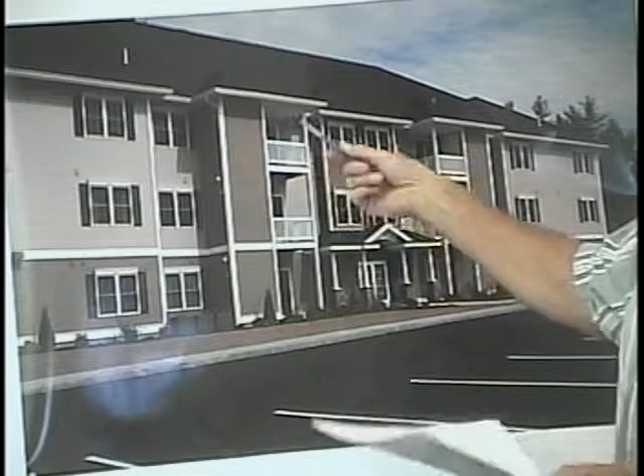In the utility rooms here, you can see the venting. Our units are 95 plus efficient units for the furnaces with central air conditioning. We also go with a direct vent, instantaneous hot water heater, Rinnai, which is an incredibly efficient unit. So we're going high efficiency on everything.

The building itself is Energy Star rated with windows, appliances, the HERS rated, and we get the kickback for the energy compliant building with the bath fans. Everything in the building is considered Energy Star compliant. So we spent a lot of extra money on heating equipment, domestic water heating, cooling, windows, insulation. Our sound transmission ratings are high.

We have a nice stone veneer entrance that you see coming into the building here. So we've paid attention to a lot of the detail. We've given it better lines by breaking it up, doing shake shingles here and then clapboard here, changing the colors, going with the darker color on the bottom so it doesn't show up if you have any splash or anything, doesn't show up as much on the siding. Putting the frieze board, as you see here, to break it up, the railings between the units, the turned columns. So there's a lot of attention to detail on the plans. Window caps with keys over windows, shutters, all of that gives it that ooh appeal. So when someone goes up, they're going to say, ooh, that looks nice. So it's dressed up.

And off to the far right, you can start to see some of the garage stalls here. There'll be 10 garage stalls per 24 unit building. So there's 10 bays per 24 unit building. And in those bays, there's an electric door opener. So when the tenant comes in, they'll have a door opener, they hit the garage door button, drive in, get it out of the weather, come in.

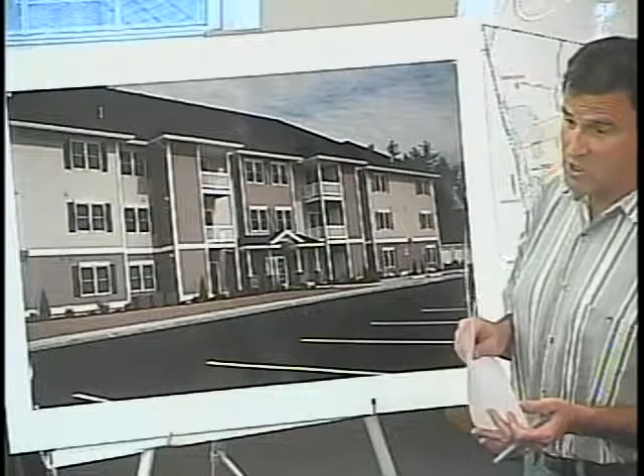Interior of the building, standard items are tile floors in the kitchens, tile floors in the bathrooms, granite countertops in the kitchens, granite countertops in the bathrooms, undermount sinks, as we mentioned before, air conditioning. When we do the tile, we don't just lay it square, we put it on the diagonal. It's everything to make it just a little bit better.

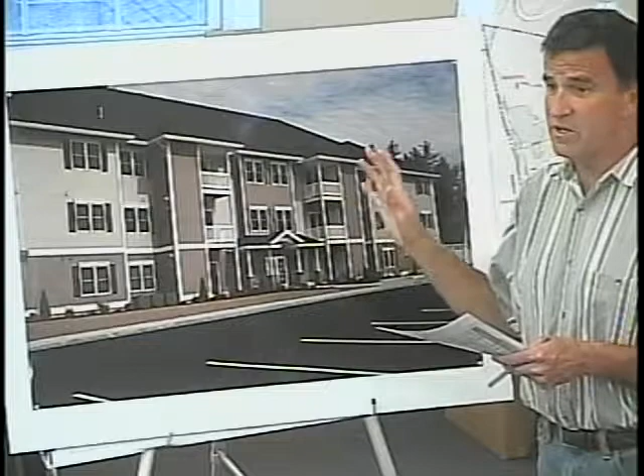The other thing we do is, a lot of people think it's foolish, but I think it's a good idea and it looks nice: as opposed to doing sheetrock, because it's the lowest amenity known to man, we do blue board skim coat plaster. It's our intention to go blue board skim coat plaster in the building as well. It's a superior finish, it's a nicer look, and it's, again, a better presentation inside.

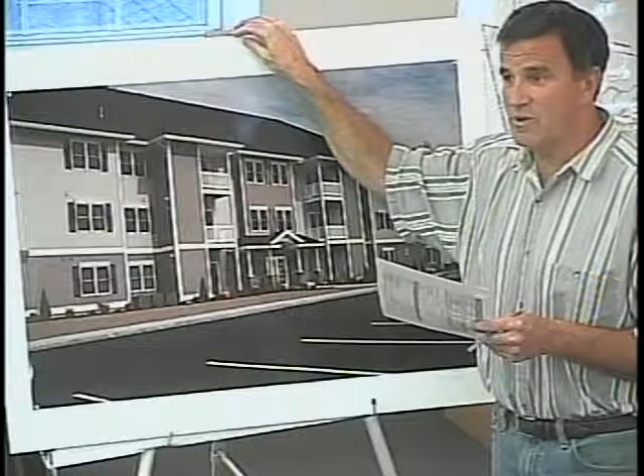What is the ratio of handicap units? You've said that when we were on the tour, but I forgot. It's basically 1 in every 20. And believe it or not, the handicap units are the most difficult to rent at the end of the day.

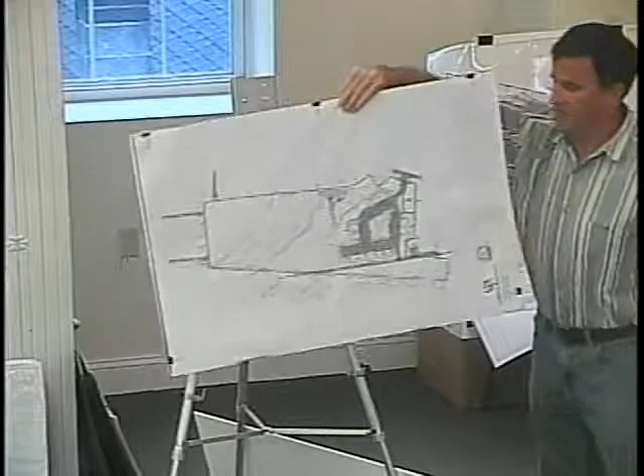Any further questions? Yeah, I believe the fire department expressed an interest in wanting to be able to gain access from the rear and the front. That's a good question. Have you been able to address that? Yeah, Wes and Brian, we had a meeting on that, and I said, let's address this at the front. So when Wes shows his plan, I don't want to steal his thunder, but he doesn't know that I knew his secret little flip around trick.

This area here will be grassed, but underneath the grass, we're going to go crushed concrete. It will provide a hard surface so that if a truck needs to access and go right around the building, they're not going to go through loam or a clay area. It'll have 4 inches of loam over the top, but the base will be a foot of crushed concrete. So it gives a hard, durable surface so that if they need to fight the fire in front of the building, they can. If they need to access around the building, they can, even though it will be lawn.

We've done it in the Townsend building, and we're also doing it here. We've deliberately pulled the parking spaces away from the building, so if there is a fire, the ladder truck or any type of emergency vehicle can access the front of the building without having cars in their way. Any other questions?

I'd like to mention one other thing, because there was a question brought up probably 2 meetings ago that I didn't have the answer to. I wasn't clear on it. I checked the regs, and there is a $30,000 gift of recreational equipment that is going to the town on that parcel here in the front.

So that's also part of the project. So you're putting that on the table? It was already on the original one. And you're maintaining it? Yes, we're maintaining that. Yeah, that makes very good sense.

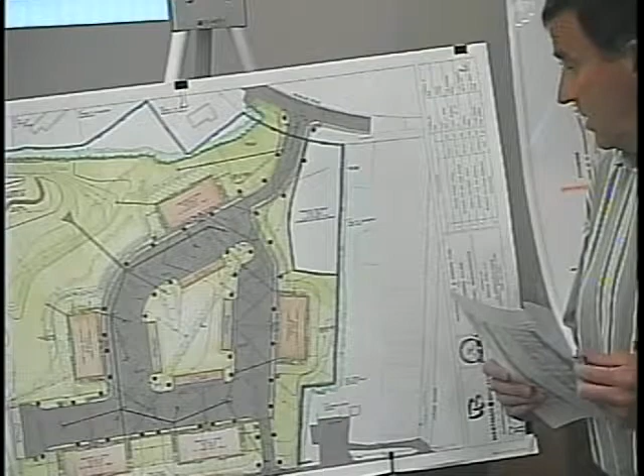Okay, any further? Is that it? You all done? That's it. Short, sweet. You got through almost your whole pitch, not quite.

Are we supposed to be asking questions on the plans right now? Yeah. Okay, so, as far as the garage spaces, you have 10 garage spaces per unit? Correct. Per building? Yes. Is there enough room to park in front of the garage without impeding the pavement? Why don't we have Wes, the civil engineer, answer that question as part of his presentation?

For the record, my name's Wesley Fliss, with Whitman and Bingham Associates, civil engineers on the project. Just to give you an idea of the overall piece of property, and I know everybody's pretty familiar at this point, you can see the overall piece of property here is outlined in blue, with Whalom Road here on the northern side. To give you an idea of the scope of the project and how it was limited basically to the eastern half of the property, really left the western half of the property, and even along here to the southeast along the FNL right-of-way alone as part of this development.

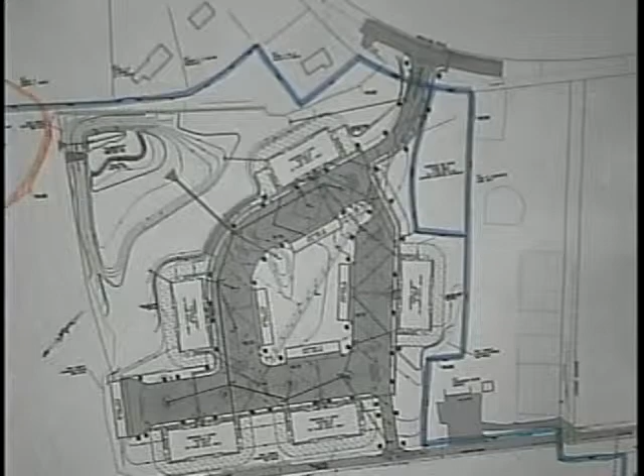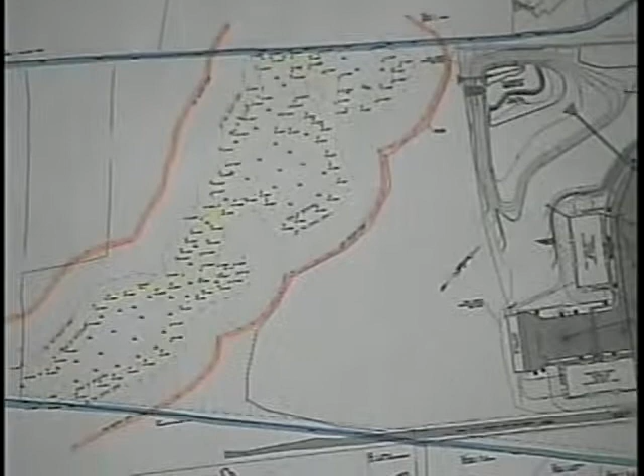Highlighted here is the wetland in yellow, and the 100-foot buffer zone in orange. I know there was a question earlier about getting comments from some boards, maybe the Conservation Commission. We don't plan to file with them for this project because we are out of the 100-foot buffer zone. The closest proximity for development is roughly 120 feet, and the closest point to any impervious surface is about 450 feet to the wetland. So we felt this was a lot more environmentally sensitive compared to other projects we've brought forth in front of the board.

Just a benefit of the new layout that's in front of you.

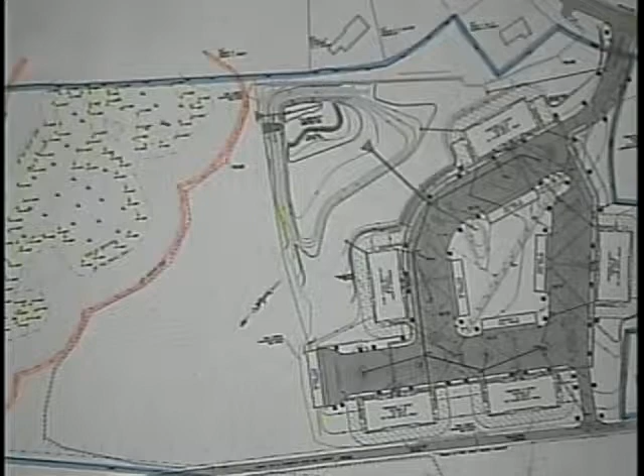Again, just a closer version of the developed area we're looking at here, with Whalom Road to the north and the FNL right-of-way to the south. The main entrance is going to be off of Whalom Road, approximately where it was before. As part of this new layout, we adjusted it a little to the west to accommodate the new building layout. Also, before, because we had lots on each side in the initial version, we were trying to squeeze in 2 lots along the entranceway.

Because of the new development, we aren't trying to do that anymore, so we were able to slide this over a little bit to give a better sightline, and also to avoid a utility pole we had originally proposed to move that sat in the entrance. Now we're able to move the entrance a little bit, saving Mr. Lorden from having to have that utility pole moved.

Currently, as part of the previous design, Mr. Lorden did bring the water and sewer off of Whalom Road, so that's already been done, along with the clearing of the piece of property.

As Gary said, we're looking at 24-unit buildings, with 5 different buildings, similar to the concept brought forth about a month and a half ago in front of the board. We have the 5 buildings located throughout the site, along with the 5 garage buildings. The garages have 10 stalls per building, and 10 stalls per 24 units.

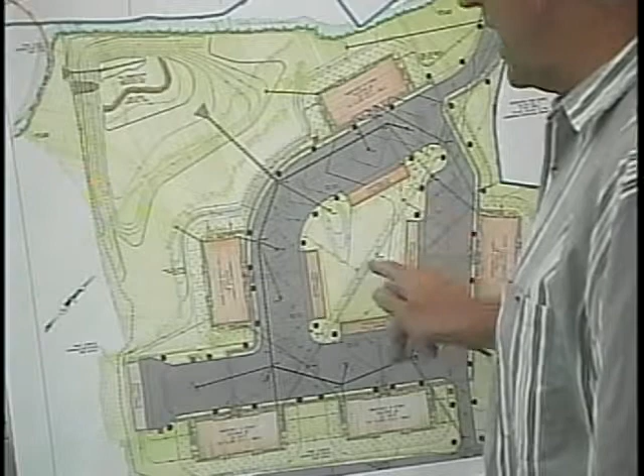Well, we haven't addressed an overflow parking area, but if the board would like us to add additional parking, we'd be amenable to doing that. There's 2 per unit, which is more than what is required. And in this area, this garage, even though you have in-stall parking here, they can park in front of the building as well. There are 10 more spots, so you have an additional 50 parking spots added on top of the 2 per unit.

They're going to take care of 2 weddings occurring on the weekend? For a wedding, it'd be a small wedding.

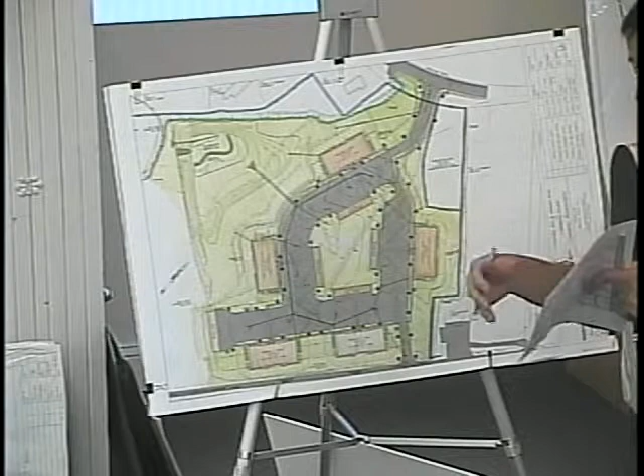Yeah, small. But if the board requires, if you'd like to see more parking, because obviously less is best for impervious area, but we can. I wouldn't want to be a burden, but on the other hand, if it could accommodate all of the social needs of the community. I only raise that because where my friend is, that's what they do, they have a nice free overspill area. And of course they have tough rules, because if you park in someone else's spot, they tow you out and it costs you a couple hundred dollars, right on the dime, because they watch it carefully. So they have the need for overflow.

I think it's a lot less likely that you would see that sort of activity in a rental development rather than a condo development anyhow. Yeah.

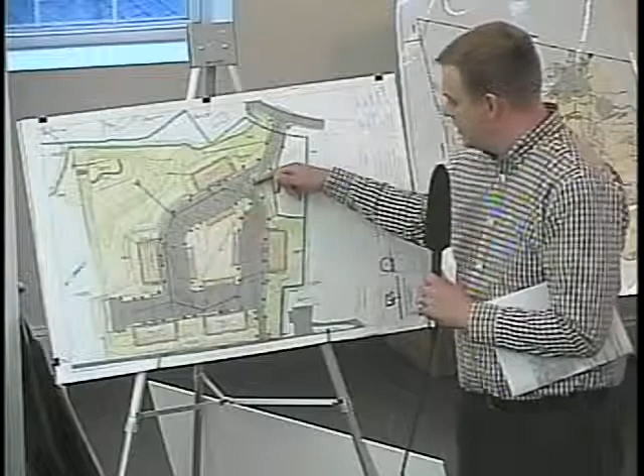There's a lot of parking. And just so you know, Mr. Bowen, because we heard the comment at the last meeting, we did design this with some future parking if the necessity came about. So what we show here is 18 future spaces here and 16 future spaces here. We included it in our drainage calculations so that we knew if the need arose in the future that Mr. Lorden needed to throw in some more parking spaces, because maybe there's more parking needed by the residents there, or maybe just by activities that might keep popping up through this development. We do have some future expansion there, so we do take into account some future expansion for parking spaces.

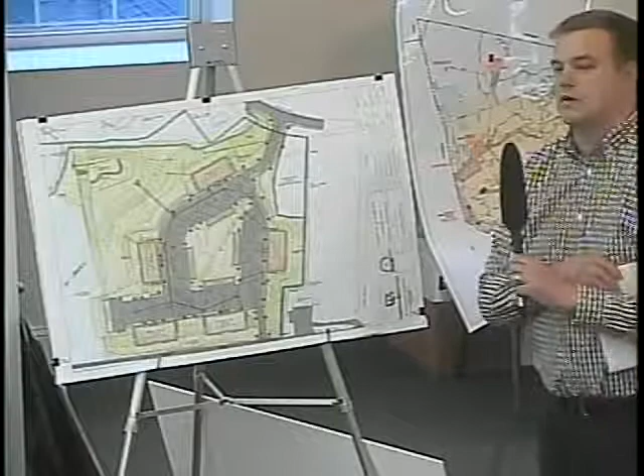How are you handling the garage, 34 spaces? Is the garage an additional rent? Does it come as part of the rent for one of the units? It's additional rent, it's $100 per month. Okay, so it could be either a parking space or storage for somebody. They can do whatever they want with that. So if they used it for storage, you'd lose those parking spaces.

Yes, but we're covered with the 2 per unit as it is. I understand, it's just my opinion, but I would like to see that each unit gets deeded 2 spots to do with what they want, and then there are some visitor parking spots designated for visitors somewhere else. Because right now you do not have a plan for that. I would look at it as if it's a 1-bedroom or a 2-bedroom, if you have a couple, there's 2 cars. And I know regulations say you don't have to have that, but in most of...

I don't have a problem with adding more parking. I wouldn't want to mandate or designate parking just for the fact that it becomes a problem of policing and people calling, we'd rather have it be open parking and add additional parking. All right, it's, like I say, in the end it's your units and you can do how you wish. I just look at it as if I was renting and ended up having to walk a half, quarter mile from my unit because somebody had a party, I wouldn't be too happy with you.

Mr. Chairman, just a note on the parking, and Dick can chime in as well. With our experience with these kind of projects, with 1- and 2-bedroom units, they generally don't generate a lot of cars. I don't know if Gary can give you a real life experience since he manages these kind of apartments, but my sense is that the average number of cars per unit is less than 2.

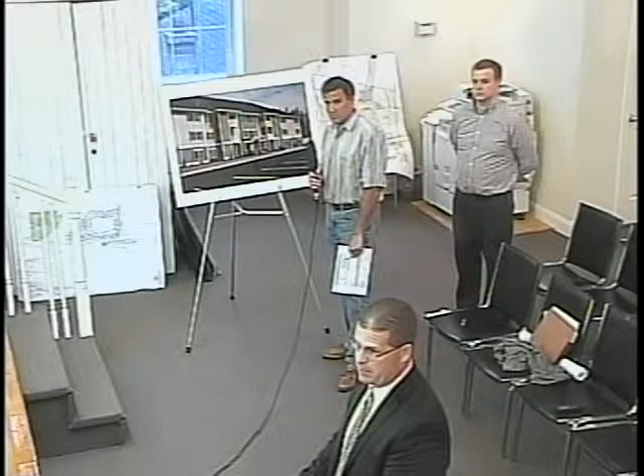I've had one approved in Andover, which is in the city. I've got one in front of my board in Chelmsford right now that they're at 1.75. We actually asked them to see if they could go a little bit lower so we could increase the open space and get rid of some impervious surface, and they said they weren't comfortable going below 1.75, but they were happy at that number.

So you've mentioned 2 areas where there's much more mass transit than there is here. So there's no mass transit next to either one of these sites. It's a walk from over a mile to the bus stop.

I feel compelled to get my 2 cents worth in because I have a difference of opinion from him as well. My inclination is to go with less impervious surface, so it seems to me that 2 per unit is reasonable, and I can relate to what you're saying with the 1.7.

What we generally do is ask if there's a concern about there being sufficient parking, which is exactly what Wes has done with the plan. It's what we call land bank. You actually show them on the plan, but you don't construct them until such point as it's deemed necessary that there is insufficient parking.

Again, it's very important for the developer to have sufficient parking, because he's not going to be able to rent his units if there's not enough parking. People aren't going to want them. Right, so I'm just trying to mitigate an issue later on.

I think the best way to handle that is again to land bank it, not overbuild, and then if it's necessary, it's not too much of an issue to put the parking spots in for those 18 spots or whatever they are.

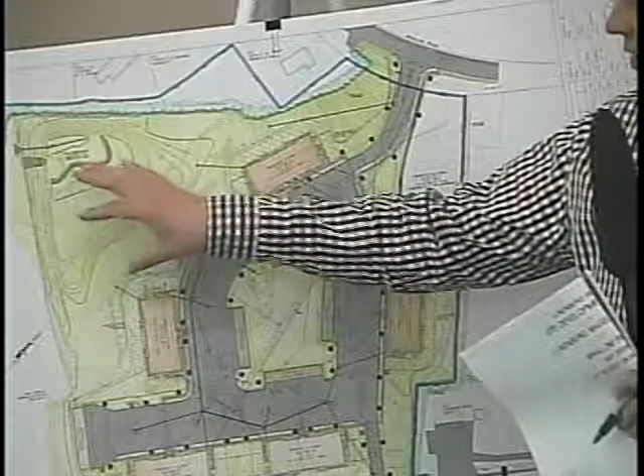The basin we had before in the previous design was 6 feet deep. This one is 4 feet deep, with the water only reaching 3 feet deep. The intent is to blend it better into the landscaping, and also because of some standards we have to meet, we didn't want to build the backside of the basin too much higher than needed. So we stayed with a shallower basin this time to reduce construction costs, and also allow it to blend the upper portion better into the existing landscaped area, so it isn't as obvious that it's a detention basin.

I know at the last meeting Gary pointed out, and any members who went on the site visit saw, there will be landscaping around the building. We also show some street trees on the site, and our typical hay bale silt fence. Our construction entrance will be off of Rogers Way, off of Whalom Road—the proposed road name is Rogers Way at this point, carried over from the previous plan.

On some of the plans we show a construction erosion control plan. We also show the snow storage plan from before, so the board can see that. On a development like this, I know Gary said he's going to have a machine out there, but there's plenty of space for snow storage now. I know before it was a concern of the board with some previous developments, but we continued with that plan.

Just to wrap up, the benefits of this plan versus the previous plan: we're looking at a little more than 5 acres of impervious surface with the plan in front of you right now. The previous plan with 80 units was about 9.5 acres of impervious surface, so there's a large reduction. Even with the plan you approved with 64 units, we were at 7.2 acres of impervious surface, so there's still a significant reduction. That was a question of the board already this evening about parking spaces, so we have a significant reduction of impervious surface with this layout, and I want to give you those numbers to compare with the other options you have in front of you.

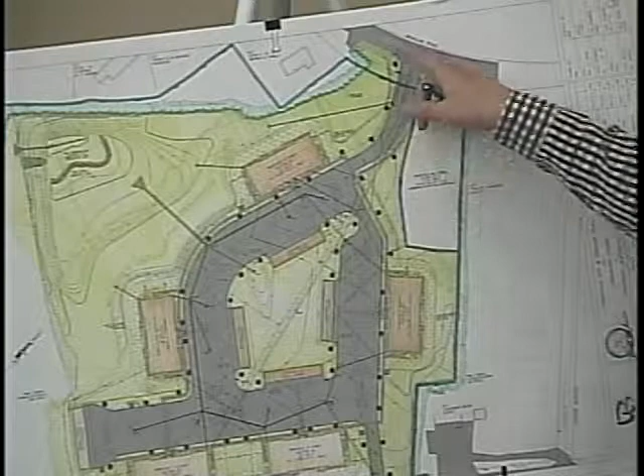Gary, I just want to make sure the board knew, with regards to fire protection, we do show hydrants here. It was requested before that there be an extra hydrant at Whalom Road, so we continued with that request from the water department at the time. We also show 2 extra hydrants within the development to service fire protection out here.

The landscape - we've talked about this, but unfortunately there aren't many trees left on the property. The question is about the part of the property you're not using - how far back behind the units do you plan on letting nature take its course? What are the plans for behind the units? I couldn't make out the landscape plan from what you gave originally.

Our intention is to go back about 50 feet behind the buildings, landscape up to that portion, and let the rest go back natural. A lot of it, if you walk out there, is already coming back with a vengeance. So you'll be maintaining some kind of...

We want a 50-foot strip around the back side of the building, mainly for fire accessibility if they need to get back there. Plus, I've got this thing for kids and playing and stuff - it's nice to have an area for them to let it rip.

I also, if I could take a moment, one of the letters that came in earlier from the Water District - their building is located here, the Water District, and the piece of land that they're referring to is this area here.

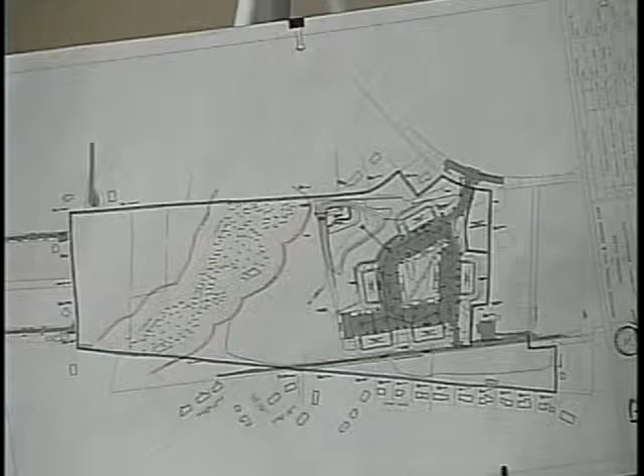Just one more quick question. With the new plan, how close are you now to the closest residential homes that surround this? Just because of all the concern we had from neighbors - what's the plan for buffers to those closer homes?

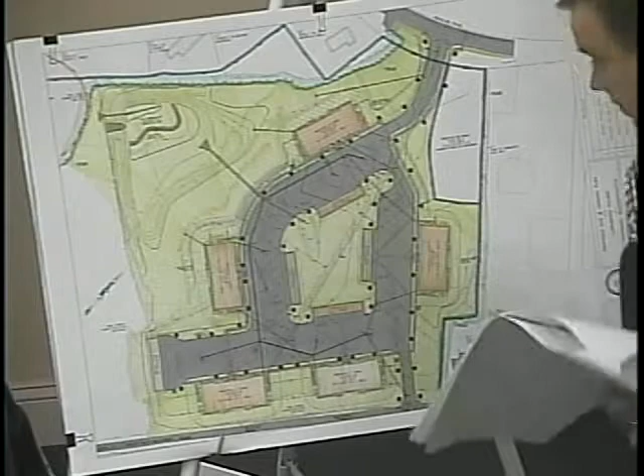Nearest property line, nearest home - the nearest home is Rowley's, right here. This unit here, to the property line is 71 feet. To the property line itself, 71 feet. And then these down here.

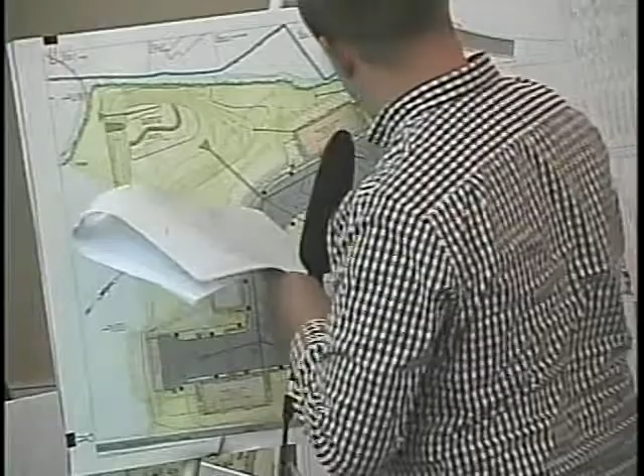Page 2 - to the house, we're looking about 120 feet. Obviously, we had a lot of homes that were very close to it at that point, and we're pulling all of that back. We're looking about 70 feet for the closest home there - to the home, approximately doubling the distance.

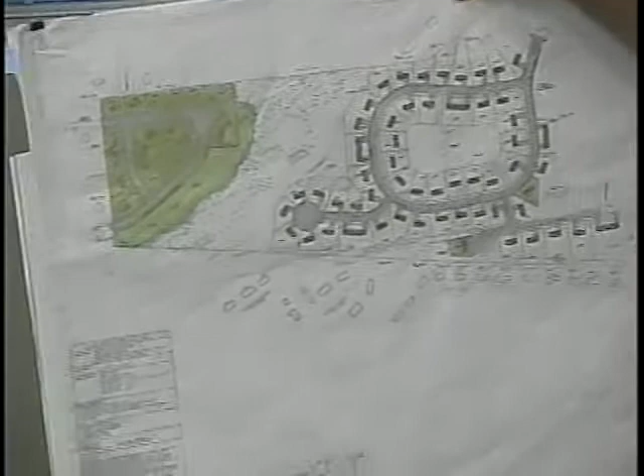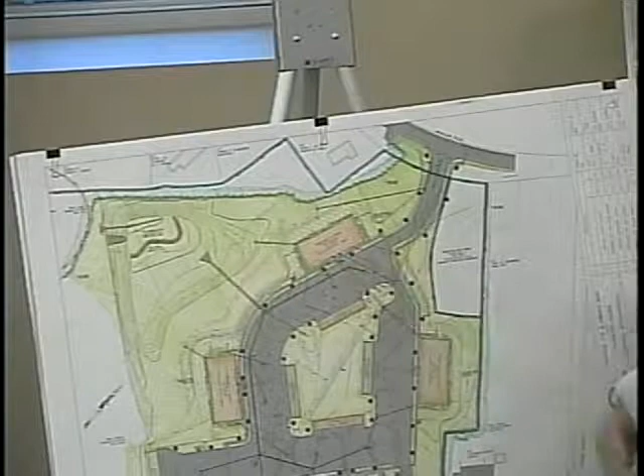In that area, after the 50 feet you had talked about, the grassy area - are you going to let that vegetate so there's a buffer zone to those homes, or is there any other plan? Right now, we were just planning on planting grass in the 50 foot area and letting the vegetation continue to grow.

So the answer to your question is yes, it would provide a buffer zone. Yes, but we weren't going to be planting additional - that will provide a natural buffer zone. Exactly, yes, and now that the canopy is gone, that lower growth is growing very quickly.

Okay, thank you. Further questions?

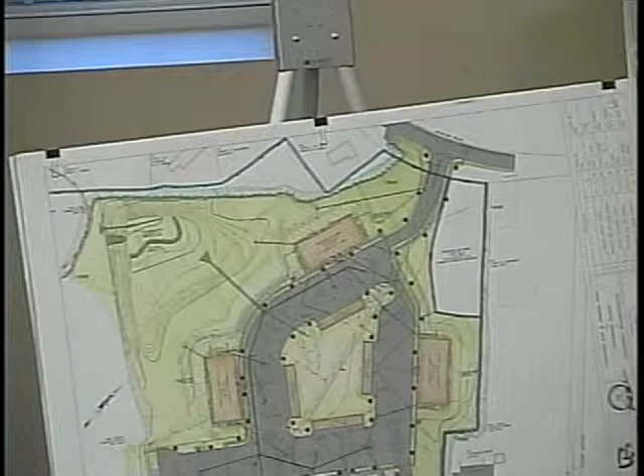You never look this way, Don. He always looks that way. That's what he's here with - his job is, that's why we just speak out on this end.

All right, I have a list of questions, so if you'll indulge me. Just first on the parking space issue, I want to go back to that briefly. If the board was interested in seeing less parking, is it possible to bank some of the spaces? Right now you're showing about 2.5 spaces per unit with the garages. If the board was interested in seeing less, could you bank some? I could, but to be honest with you, that wouldn't be a high interest of mine.

In the rentals, it's important to have parking because I'm competing against others, and you don't want to be at a disadvantage in the parking area. So you're saying you think you'll need the 2.5 spaces per unit? I think it needs it for overflow - I don't think it needs it for the actual usage of the unit, I don't believe it needs that at all for the unit. But on heavier flow days, if someone has a function, a Christmas party or visitor party, I just think it's necessary to have it. I'd like to stay at that, unless the board felt very strongly about it, then I would consider it.

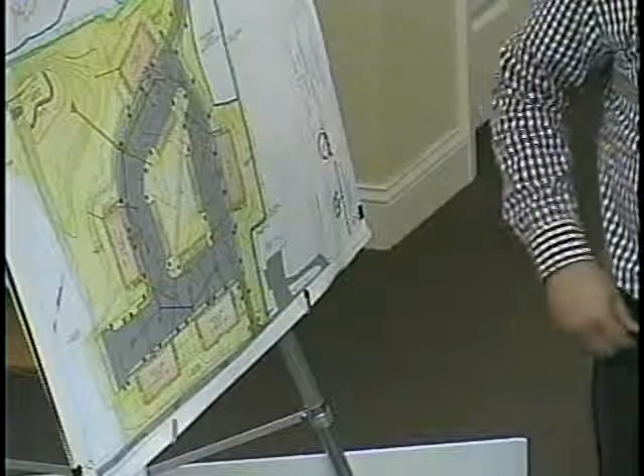Right, we were trying to get enough pitch for the water to flow in that direction. Well, you can do that, but instead of doing a depression, you could do like a swale that runs along the road. Do you know what I mean? No, and that's one of those things.

Like I said, trying to prevent what we've seen in the past, which is when they plow, they're going to end up having a snowbank in here. This is going to melt, and so we can look at shrinking it down. But we were trying to get a positive pitch there without having the water sit behind those garages. That's the intent there.

Well, I'm sure that we can look at shrinking it down, trying to create more green space is what you're looking at. I'm just saying make it all flat so that this is a flat lawn area that's maintained, similar to if it was a field, and you pitched it left and right and had it drain around the perimeter to the low point. Right, and I don't think it would work ideally.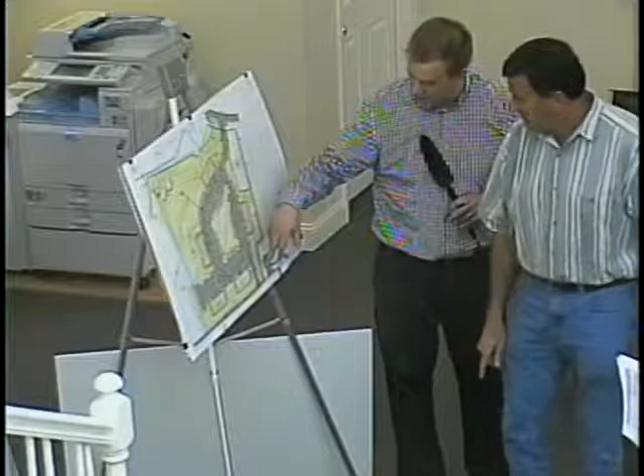Put a basin on the road edge, in the road. So we could bring it the same way, bring it here and put the basin here, right? On the road. When it gets into the road, the low points are here. And just so you know, Dan, up here we're at 485, and down here we're at 481. So there's a 4-foot pitch from the high point in this area here to this lower point.

And that's why there's some pitch there. So if you're looking for a general flat soccer field, it would make it very difficult to do that. It would create more fill for Mr. Lorden to really put into that area to make it work, and then he'd end up having to use the back of the garage as basically retaining walls. It would become something that, to be honest, I don't think Mr. Lorden would want to get into. We do show a very gentle pitch from here into that area, and it gives a flat enough area.

Like I said, we may be able to tuck some of this back here and still get enough pitch to get that water to flow in a positive manner. But again, we were looking to not have any water sitting there because we know the soils are poor out there, we have high groundwater, and you're not going to get a lot of infiltration back into the ground. We're looking to have a positive flow of the surface water out of that grass area.

I get the point. I think there's other ways to engineer it, but now that you've raised another issue, that it's not going to be flat. So my comment would be, if this is going to be the only meaningful passive or active recreational area for all the units, this is a large project.

It's over 100 units. How big is the area? And what is the parking drop? We're looking at about 485 in the back here, 483, and 481 in the back there.

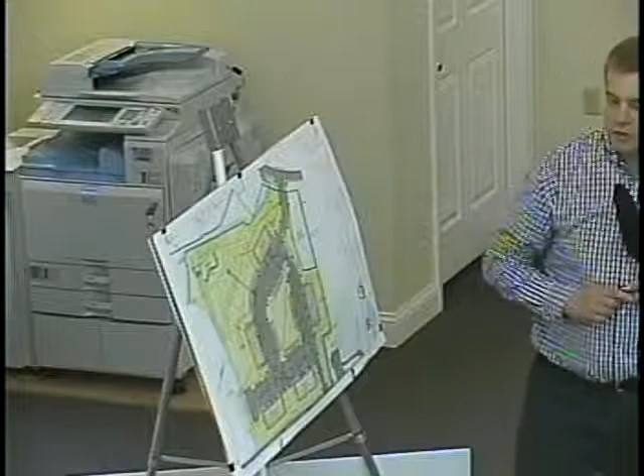On the main detention basin, you're showing some sort of spillway that goes towards the wetland. Is that an emergency spillway for the excess of a 100-year storm? Yes, it's an emergency spillway, and anything in excess of a 100-year storm event would overflow into that spillway in the direction of the wetlands. So the basin itself will handle the 100-year storm? Correct, up into the 100-year storm. There's an outlet structure here with a pipe outlet into a riprap, directed toward the wetlands where it should be, not toward any of the abutting properties.

And what are we calling the 100-year storm these days, is it 7 inches? For Lunenburg, it's still 6.6 inches. Is that, given climate change and everything else, still accurate? Still accurate. If you look at Massachusetts, it varies across the state; the closer you get to the Cape, the higher the number gets, and some areas of Massachusetts are actually above 7 inches. Over what period of time is the 6.6? They call it a 24-hour storm, and it's not a straight calculation, there's a little more math to it, it's tough to make it a simple number from that standpoint.

So the rock walls shown in the plan, those are existing walls that aren't going to change, right? You're going to leave those there? Yeah, that's the intent. It basically lends itself to a good landmark to start building that berm for the back of the basin.

Gary commented about 50 feet back and then the rest is natural, but you are showing snow storage areas in various parts of the plan. Are the snow storage areas going to be maintained or just cut on a regular basis? Majority of the snow storage, maybe you're looking at... behind building number... is it numbered?

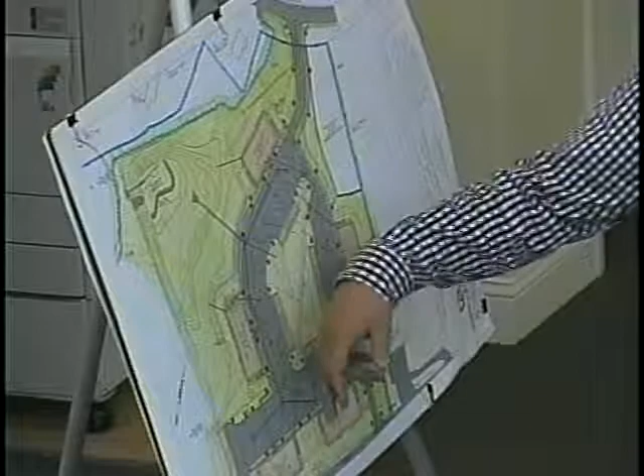This area here, number 2. I know he's talking 50 feet here, but we do show some grading in there. How wide is the path that goes around the building? 24 feet. Oh okay, I got it. All right, so it's significant.

The snow storage is basically right off the roadway, because when you're running with a loader in the winter, you're not taking it great distances, and we can stack it high. And if he needs to push it off, if we have a winter like we just had, he has some area to push it off. It's ample area, it's great for snow.

Okay, so the fire lanes that go around the building, I think you said that's going to be a base of crushed concrete, then 4 inches of loam, and then you're going to seed it? Correct, 4 inches. Can you imagine that?

Are you still going to, in the previous plan, I think you showed some privacy fences for some of the abutters. Are we still proposing those, or?

We hadn't addressed it, but in this area we'll still take it past the corner of this building by like 20 feet this way. So we'll run a fence here. I think that's where it's most important, is here. But I think that's the only area there it's really needed, along this line here. Scale up what it is to the building here and exceed it by 20 feet.

Were you going to have one on the south side of the property? I can't remember what the plan was before. No, the only place that it has any merit to have a fence would be on this side here. Everything else, remember, the F&L right-of-way is here, and then there's another strip of land here. So we've got a nice buffer here.

Just one thing I noticed, just looking at the parking lot, there's just a lot of parking here. There didn't seem to be a lot of internal landscaping, not a lot of trees or shrubs. I see where you're showing some trees along the perimeter of the parking lot, but is it possible maybe to put some trees or shrubs in the middle of the parking lot just to kind of break up all the pavement and concrete?

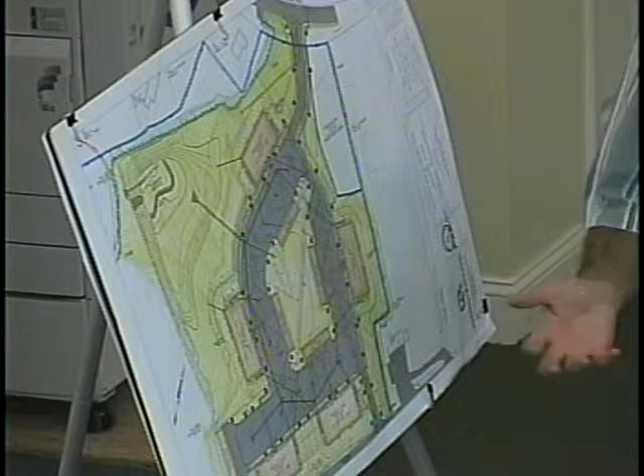We talked about that a little bit, and I said I'd rather put more on the exterior of the perimeter, because visually I like when you come into an entrance and you're lining Bradford pears, you see a nice visual. And then the problem I don't care for is snow removal. They always get damaged, there's always a problem in the wintertime. And when you're bringing a loader, the machines are so big, and you're always looking to get that area. I like to keep it clean.

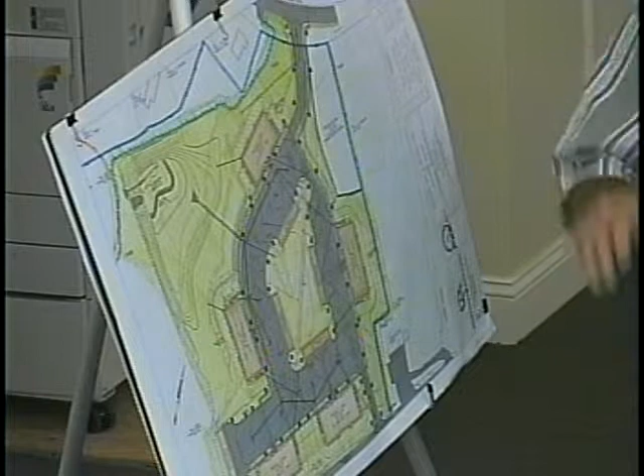I like to get right to the curbs, and it just makes your job much tougher. I'd rather add more, which we did, to the exterior perimeter, and then load up the front of the building, which we've done, and it's on the plan. The prototype is in Townsend, the same layout, and you'll see there's more landscaping than less.

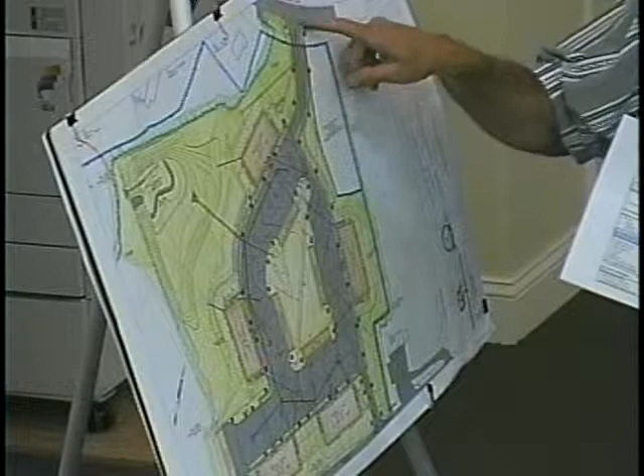And you were referring to a grass strip before, I think that was between the driveway and the sidewalk, is that right? Correct, you'd have the berm here, Cape Cod berm here, a grass strip, and then the sidewalk. What we'd propose is to have the berm, the sidewalk directly butting the berm, and then the grass strip on the opposite side of it. So you'd have a little bit bigger grass strip on the outside edge.

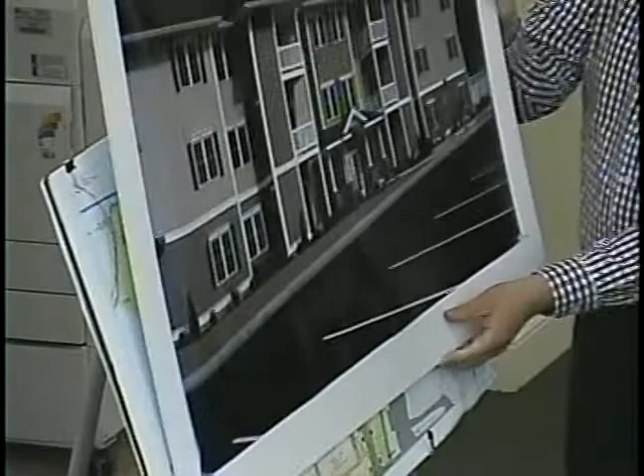So you're gonna have vertical granite curbing then? No. What we'll do on this particular one is it's proposed to go with bituminous berm, but if we can afford to do it at the time of construction, if our numbers come back right - and we did the same thing here, it was bituminous berm in the project, but in the end run I put granite at the front of the building here, mainly because the granite is more durable against my loaders, and I want the front to always have that nice visual appearance. I don't like having my berm scarred.

So when we go to the bigger properties, I put a lot of manpower out there. We take snow blowers and we snow blow away from the berms.

Always, we snow blow away 2 to 3 feet, that way the loader, when it comes in, sees the berm, and then we can remove the snow from there. So I spend a lot of extra money on man labor in snowstorms, shovels and snow blowers and so on. And we will have a bay, one of those 50 bays, dedicated to maintenance where you'll have the snow blowers and mowers and that type of stuff on site.

So when they hit it, but if the numbers are working well, then I will upgrade to granite as opposed to bituminous, but only in the front of the building.

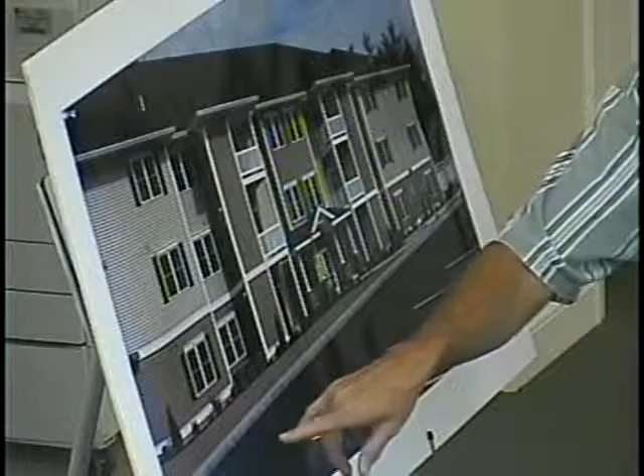Yeah, I guess a couple concerns I had with that is isn't the point of the grass strip to provide a buffer between the cars driving on the driveway or road and the pedestrians on the sidewalk? If you eliminate that and you don't have vertical granite off a Cape Cod berm, if a car goes off the side of the road, whether you have a 5-foot strip or a 0 strip, they can still get right up on the curb and hit a pedestrian.

But if you've got a grass strip of 5 feet, there's more of a buffer, but if a car goes over the berm, that's not going to stop a car from going over. I agree it's not going to stop it. The point is that it creates some space between people walking and cars. It creates some space, but your subdivision doesn't look as nice, and I don't think there's a big factor as far as the cars and the speed they're going.

Yeah, I guess I shared some of the concerns that were raised about cars going too fast along here. I know there's curves in there, but I think if you put traffic calming devices in there, that'll keep the speed down. But I can see people driving pretty fast.

I like the idea of the stop signs, and we hadn't talked about that, but I do like the idea of that. And if that didn't work, the last thing anybody wants to see, whether you're a developer or an owner of an apartment building or anything, I would certainly hope, is to see a child get hurt from cars moving too quickly. So I would do it on my own if they were going too fast, if we were receiving complaints. Because bottom line, remember, if you have a situation where people aren't comfortable staying, nothing's more valuable than your children. Anybody that has children knows it's the most valuable thing you have.

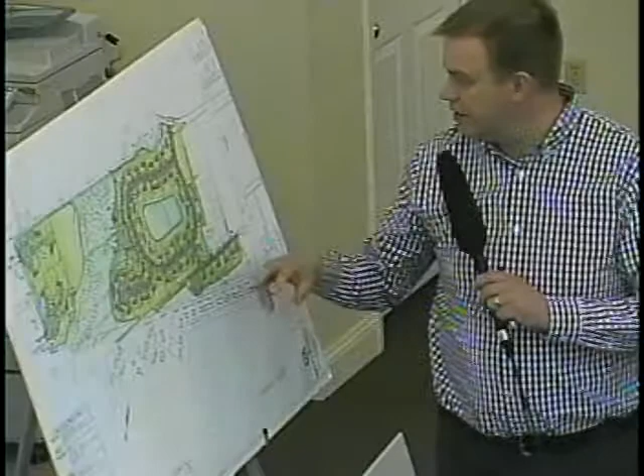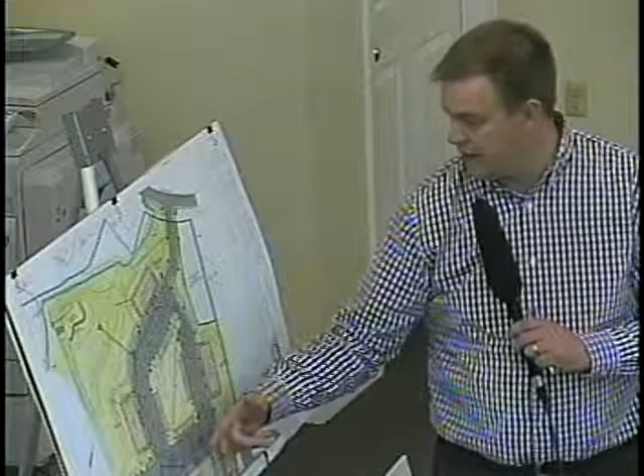Just to clarify, Dan, we were looking at gravity sewer for a portion of the residential development in this area. Everything on the lower portion, when it started going downhill, we'd have to pump back up. So in an effort to make sure everything was in gravity, we built this one up about a foot or so, and the same with these, just to get enough depth for the sewer to get gravity out to Whalum Road, so we wouldn't need a pump.

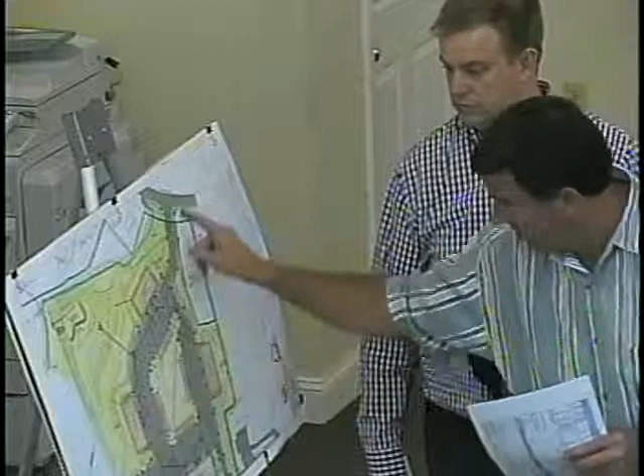What about the sewer for the other buildings? These are a little easier because we're closer to the road. The further we get away from the road, it became more of a concern. This one was easy. As we get further away from Whalum Road, because of the pitch going in the opposite direction, it became more of an issue, and that's why we brought things up a little bit here. There's a natural shelf. If you look at it from the road, you can see the shelf. It's right where the buildings are proposed. It comes like this and around, and then after that it starts to gradually keep going downhill.

And obviously that's why they proposed the basins here, and after that it was down in here. So are you increasing the elevation of the build area? Well, I guess increasing, we're not really. The way we tried doing this is we tried not cutting into the site so we can get that elevation. So here we're probably about a foot above natural elevation because of the pavement and the amount of material they're going to have in there. We're looking at kind of staying away from that groundwater issue, and also to get some depth for the sewer out to Whalum Road.

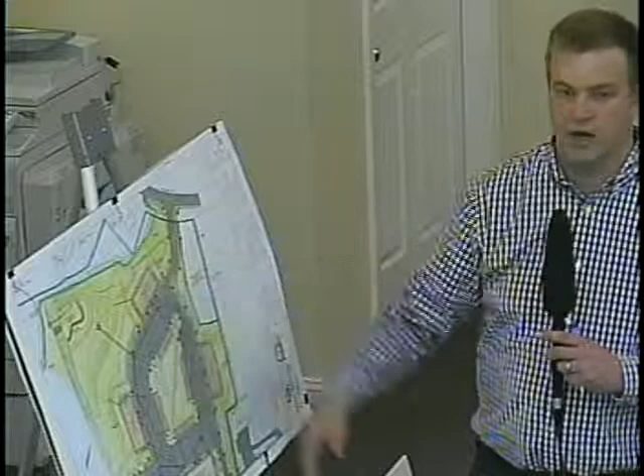Okay, so like a foot. Yeah, that's basically what we're looking at, a foot fill. More shimming than anything. Exactly, we're not talking 5-6 feet, we're talking about a foot there.

Dan, while we're on the subject matter, how far are we from developing a draft in terms of where we're at? Well, I drafted a decision on the original design. I know that, so I'd have to go back and make some changes, reshape it. A lot of it will stay the same, but there'll be some changes. And you seem to be satisfied as the waivers are going to be about the same.

Well, we haven't seen the waivers yet, based on our earlier discussion. My concern was the same that David raised, and I think Dick had raised, that it's a question of degree, and I think Paul Haverty had mentioned he's going to flag the waivers that he thinks might be increased or intensified. That'll keep us out of harm's way. We will. Okay, but the next step is the peer review, and I think, just to formalize it, the board should probably vote to accept the proposal that was provided by Fred.

All right, do we have any comments on what we've done so far? We're going to get ready to open it. We had some discussion as to the date of the fees to the town, whether they were as of when the application was initially filed, or whether it's as of today—sewer fees, water fees, building permit fees. I assume they are all as of today. Is that correct?